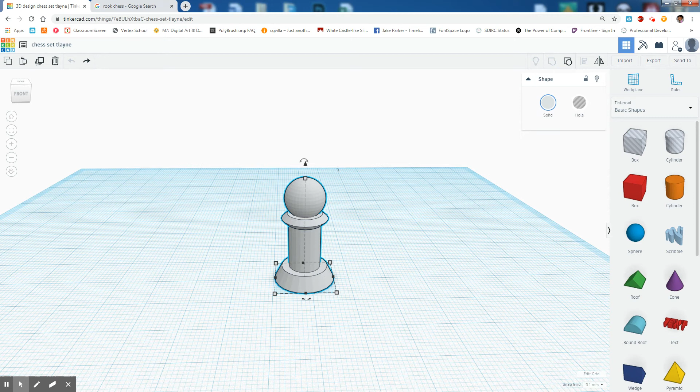So what I'm going to do first is I'm going to select my pawn. And to keep it consistent, I'm going to press Control D to duplicate it. And once I duplicate it, you see I just pulled it right out. So I now have two pawns that are the same, but my pawns are all grouped. And I need to go back to individual components. And you saw it glitched out there. We need to get back to where it's an individual component.

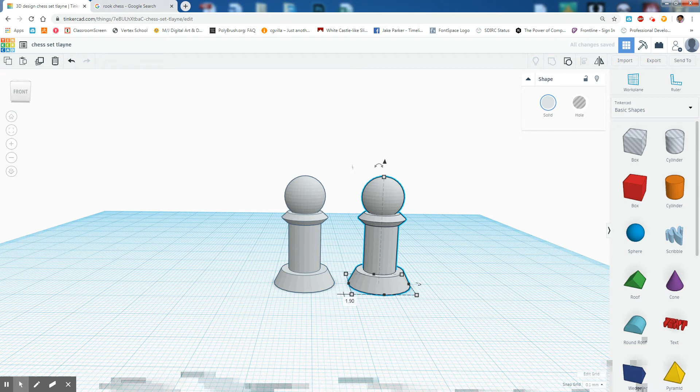So up here, if we look, we can see that we have ungroup, which is just Control Shift G. So with our pawn selected, the copy, I'm going to press Control Shift G. As you can see, it goes back to the individual parts of our chess piece. So if I look at my rook, like I said, the key things I'm looking for are the top portion, and that the rest of the piece looks similar.

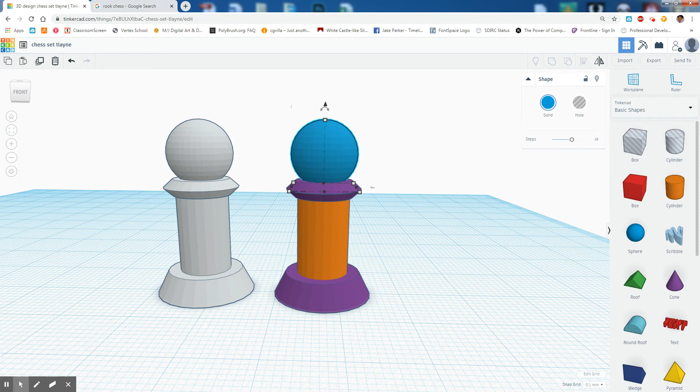We have the base, which is the same, so this part is good. This part right here. But this top part, we need to change up. So I'm just going to go ahead and press Delete on my keyboard to get rid of it. Now the rook is a little taller, so I'm going to click on the little ridge that I have here. I'm going to raise this up a little bit.

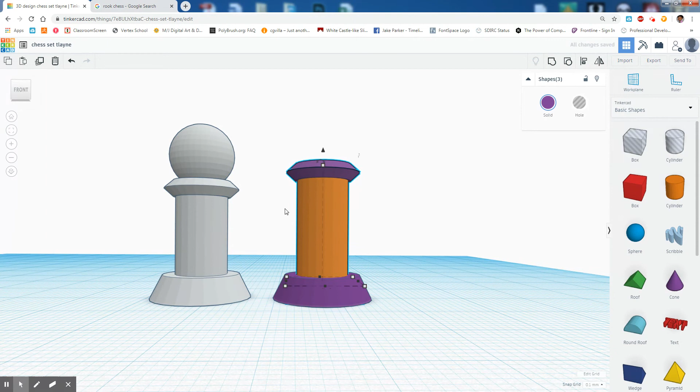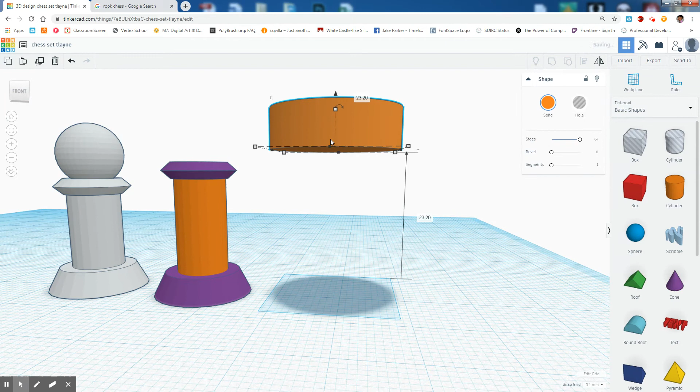And now we have to build the top portion. One way to do that is we can pull out a cylinder. And when we pull out our cylinder, again, play with the sides, make it as smooth as you want. Pull mine up and above. And granted, I have this big old giant, what looks like a giant cheese block. Oh, look, there's another duplicate. We don't want that. What we do want, though, is for this top portion to be lined up. So I'm going to make a square around my objects so they're all selected.

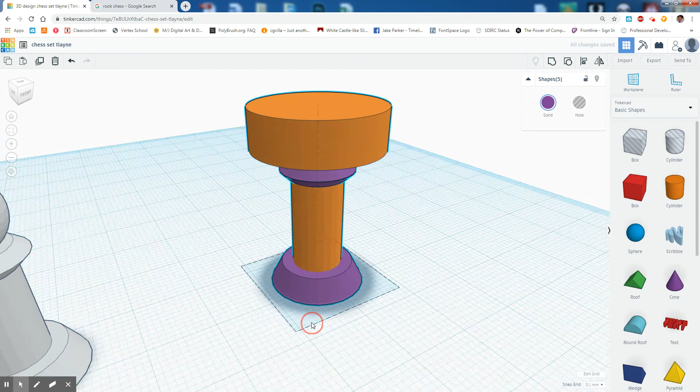I'm going to go to Align, which is letter L. I'm going to press the letter L, or you can always click there. And then I'm going to make sure they line up. And if you remember from our last lesson, to line it up, we have to click on, in this case, the center here and the center point there. Now this is too high because we have this space. We don't want that. We need it to touch.

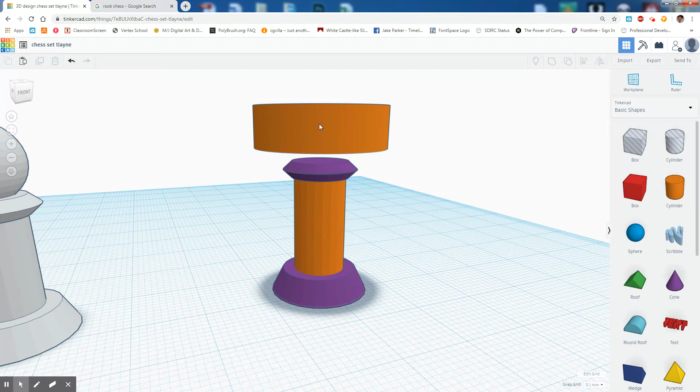So I'm going to deactivate Align, and I can tell it's activated because we have the little black points. I'm going to press L again. I'm going to click off so that way nothing is selected. I'm going to click on the top half. And then I'm going to choose this arrow right here and just bring it down. I don't mind if it goes through it a little. That's fine. If it goes through it, then I know that when I group this, it's going to be one solid object. I'm okay with that.

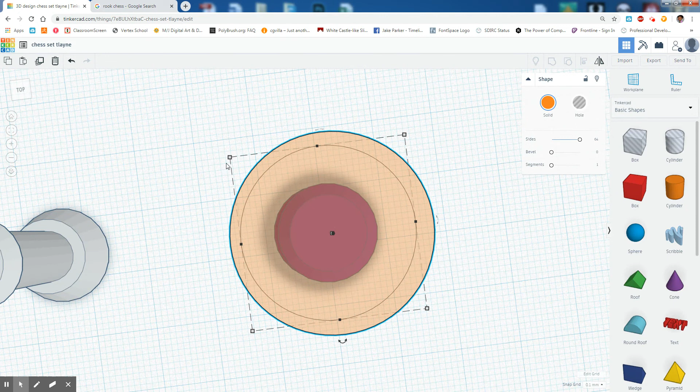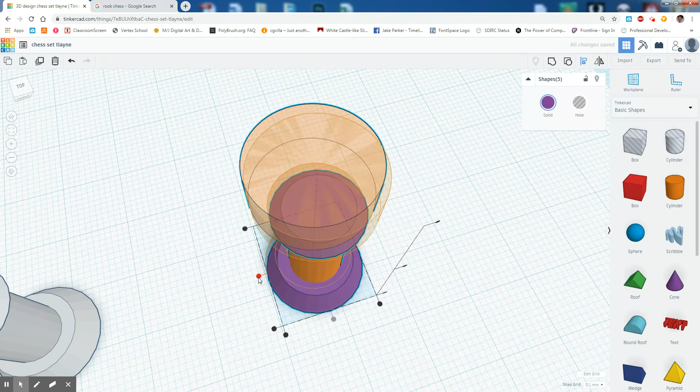But again, this is too wide. So I can always click on a corner. I'm going to manually adjust this. I'm going to say 15. A little better. Not where I want it. So I'm going to realign it again. Try again. Actually, that's not too bad. We'll keep that. Oh, this transparency, all I did was press the letter T so I could see through it.

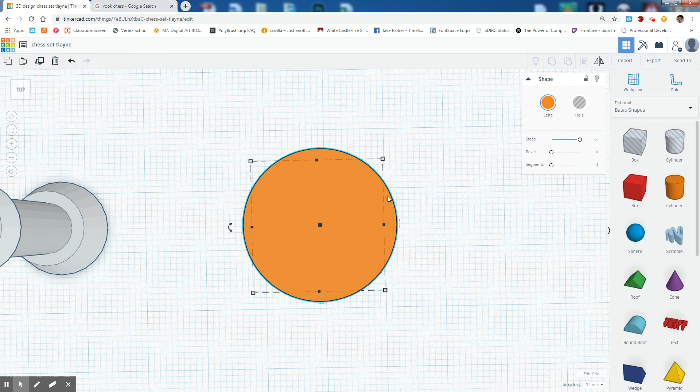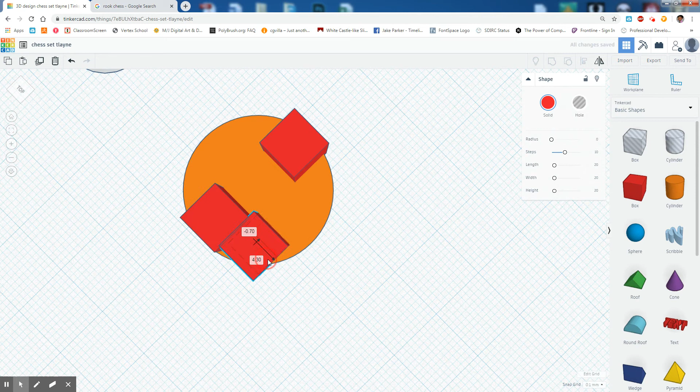So now that I have what I think is a good, decent top for my chess piece, we have to cut into it to create a negative space. Now, yes, I know some of you might be like, well, Mr. Layne, can we just make little boxes? Yeah, you could. You could take a little box and then put it on the top, and then you're stuck trying to make it all nice and neat. And that just ends up getting to be messy.

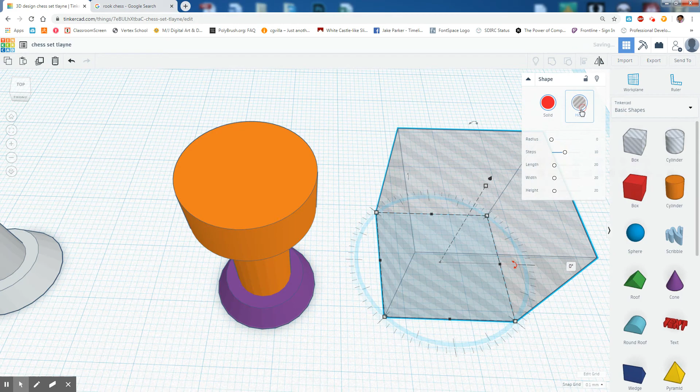Instead, I'm going to work a little smarter with this. I'm going to grab a box, and it has the hole already set. If you weren't sure about this, I think I went over this. You can make an object solid, or you can turn it into a hole, which creates our negative space. What I'm going to do is make this not too skinny, but small enough to where I think it's going to make a nice space between the parts.

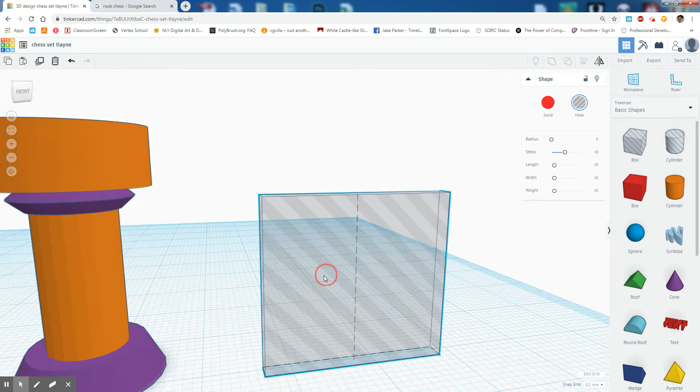And actually, there might be a better way to do this. You don't have to worry about dragging it up. What we could do is, I know we lined this up, I'm sorry about this. What we could do is we could just take this back.

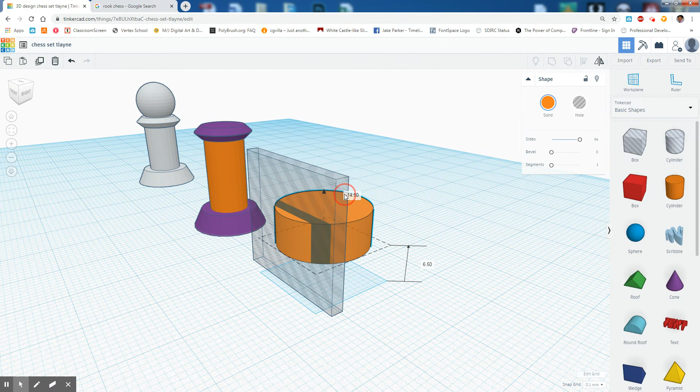And I'm going to make sure it's on this ground plane, the plane with the grid. I'm going to bring this down. And you can see that it shows you how far the object is from the ground plane. In this case, I can always just go here and type in 0. Boom.

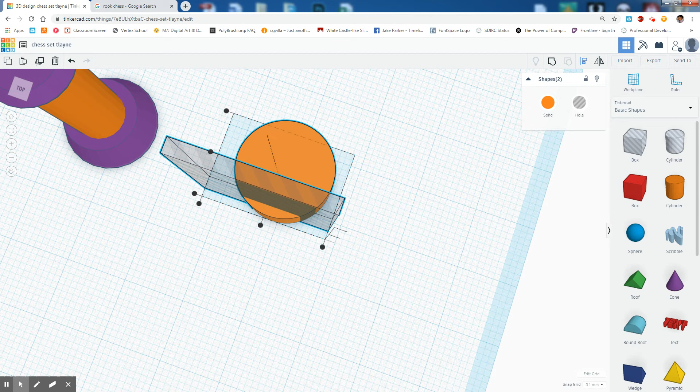So what I'm going to do is I'm going to select both objects here, the hole and the little circular portion. I'm going to press the letter L to once again align my two shapes. And then once my shapes are lined up, I'm going to press L again to deactivate. And this is what I'm going to do next. I am going to select the hole that I've made. I'll make it a little smaller. And then I'm going to raise it.

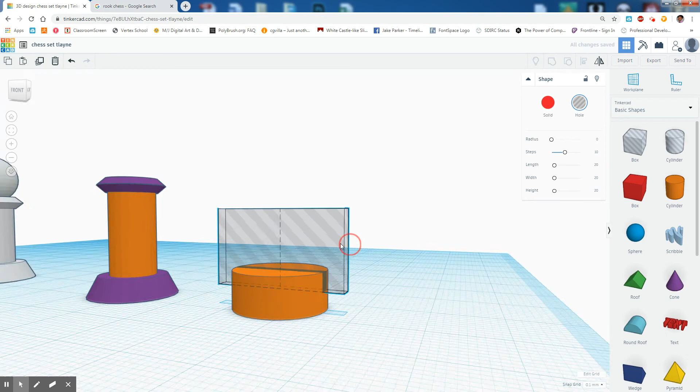And then the very next thing I'm going to do is I'm going to press Control D to duplicate it. And you can tell, especially with an object that's a hole, you can tell you duplicated it because you notice how it got darker. So I know that that's a duplicate. I'm going to go right here to my rotation arrow. I'm going to rotate it.

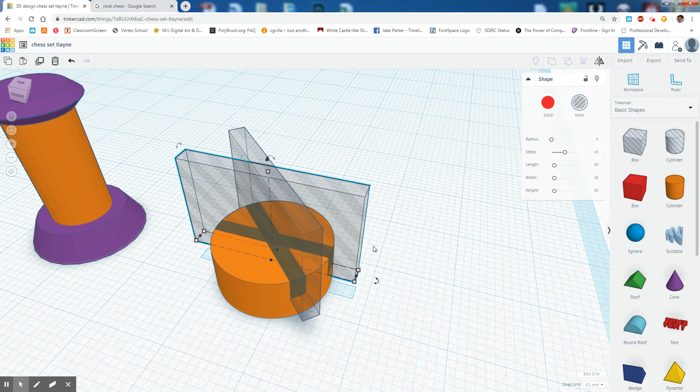And remember, when rotating, if you're rotating inside this inner circle, it snaps like 22 something degrees. Versus if you rotate on the outside, it moves smoother. Well, I want it to snap because I want it here at this nice 45. I'm going to select my object again, press Control D again, rotate again.

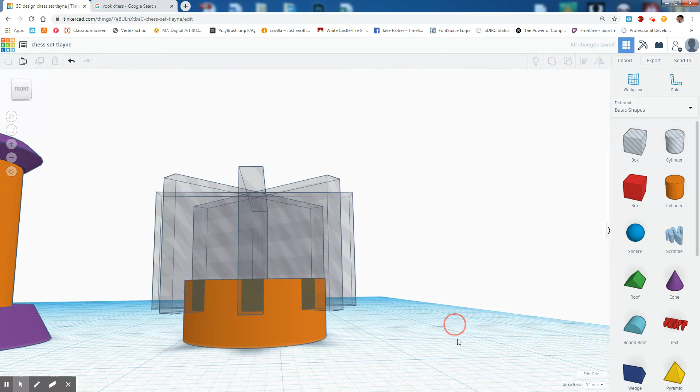I'm going to do this one more time. Oops. Make sure we rotate, not change the shape. So now we have this little like 8 setup. I'm going to do one more thing before I group this. I'm going to select my circle. I'm going to press Control D to duplicate that. I'm going to pull a duplicate off to the side, and I'll show you why in a little bit. But first, let's take care of this.

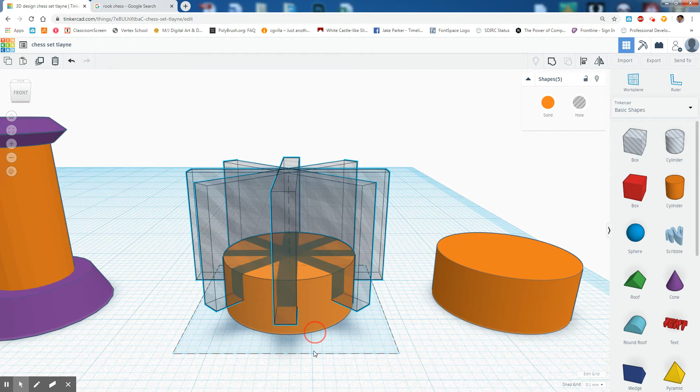With my object here, I'm going to select all the holes and that bottom like cheese circle. And then I'm going to group it. And if you forgot how to group already, remember, it's right up here. It's Control G. So I'm going to press Control G. And that looks like a nice portion to the top of our castle.

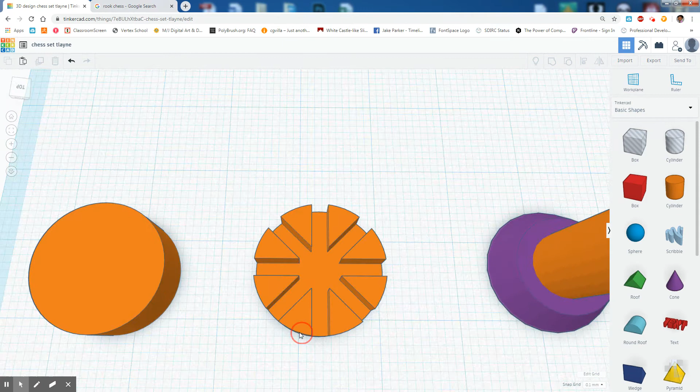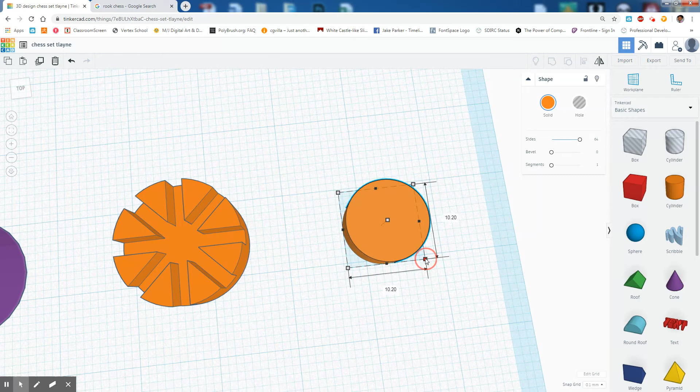But there's a reason why I pulled this to the side. And here it is. I'm going to take this circle. I'm going to hold Alt and the Shift key. And I'm going to move this inward. And notice that it's adjusting the size of my object. Not that much. I'm going to raise it up a little bit more. Don't accidentally hold Shift like I just did.

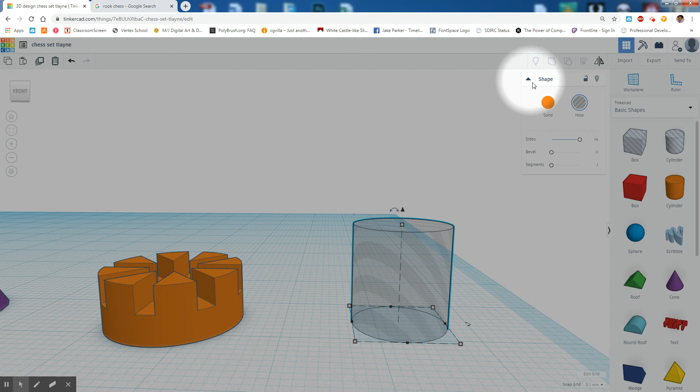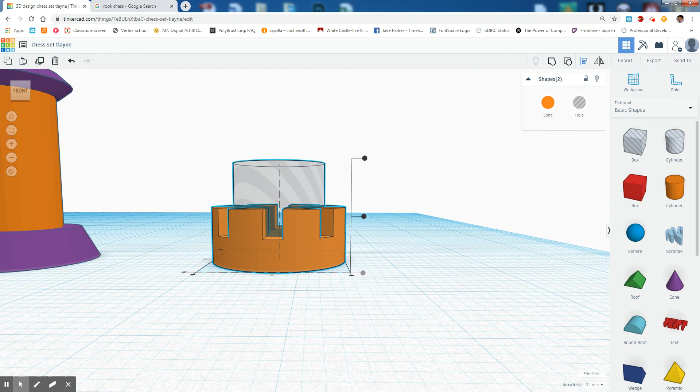And then I'm going to go over here, the properties, and hole. Now, if you can't find your properties menu, remember the shape has to be selected. And then if you only have this much, click on this down arrow, the down caret, and you'll see the properties here. We want hole. And because we want it as a hole, I can take this over here, select both my objects, press L to activate. One's here, that's already centered, so that's good. Press L to deactivate align.

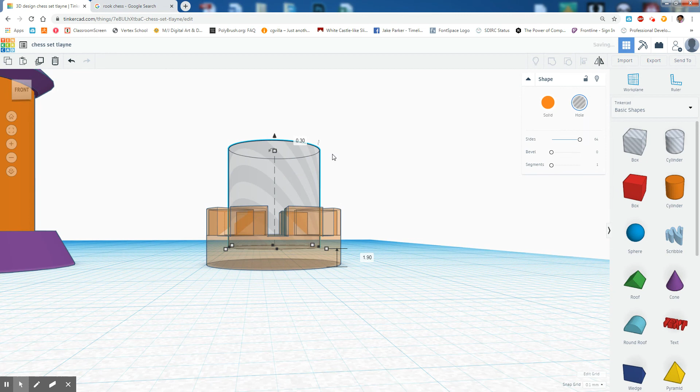I'm going to click here on the hole object. I'm going to raise it up. Don't go too high. If you're not sure, select the solid object and press T. You can see how high you're raising it. I think the height I have it now is pretty decent. So I'm going to leave it where it is. I'll select this and press T again. And finally, I'm going to select both objects, press Control G. So now it looks like a proper top portion of a rook.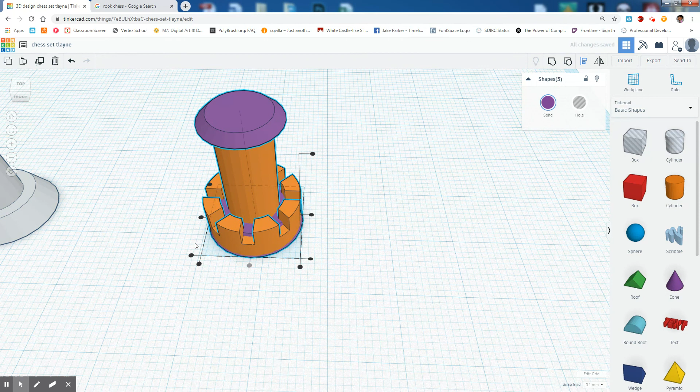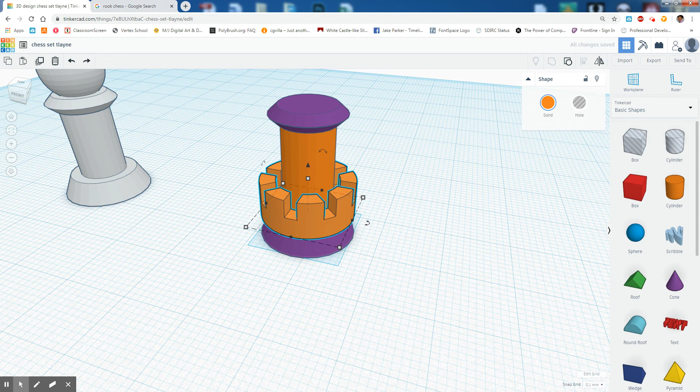With this, I'm going to bring this back over. Again, I'm going to select all my objects, align the center point here, align the center point there, press L to turn the alignment off, click off of it, and then click back on just for the top half. And if you have problems selecting things like this to raise it up, you can always hold Control and press the up arrow on your keyboard. If you hold Shift while holding Control and up, it'll move faster. Anyway, once I have that raised up where I think it's just right,

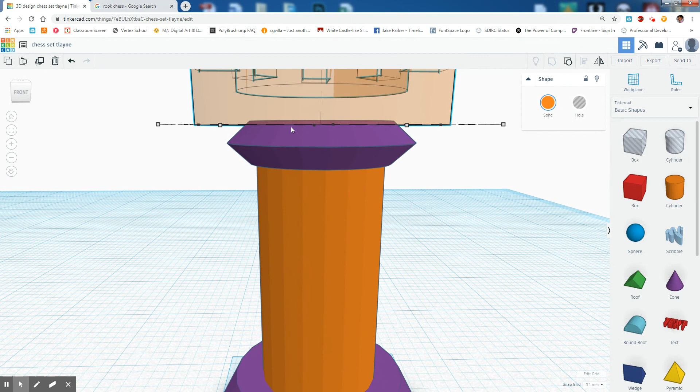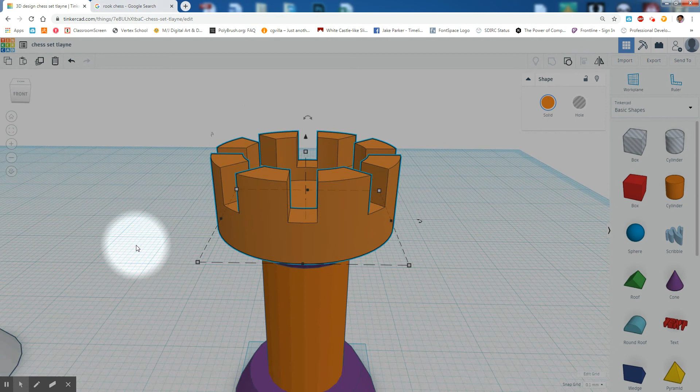this is where we're going to turn on the orthographic view so we can see it from the side. You can tell that this piece is now definitely not exactly on top of it, but just enough. Here we go back to perspective. With this, I'm going to select my objects, press Control G. It's going to group it. I'm just going to change my color. And there you have it, the rook.

In the next video, we will discuss how to make a bishop.